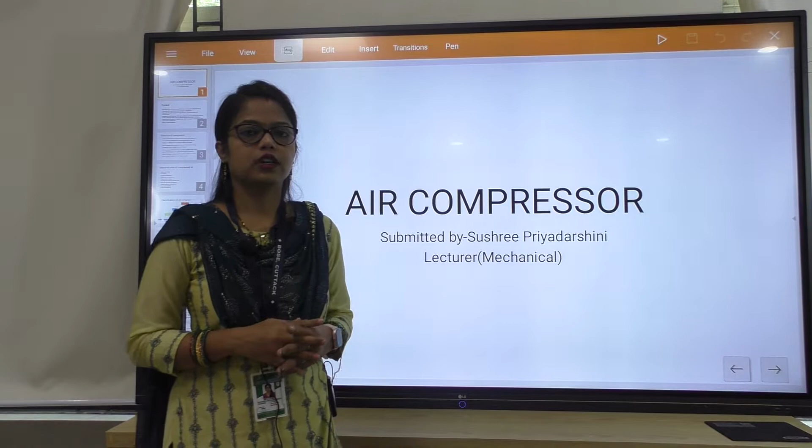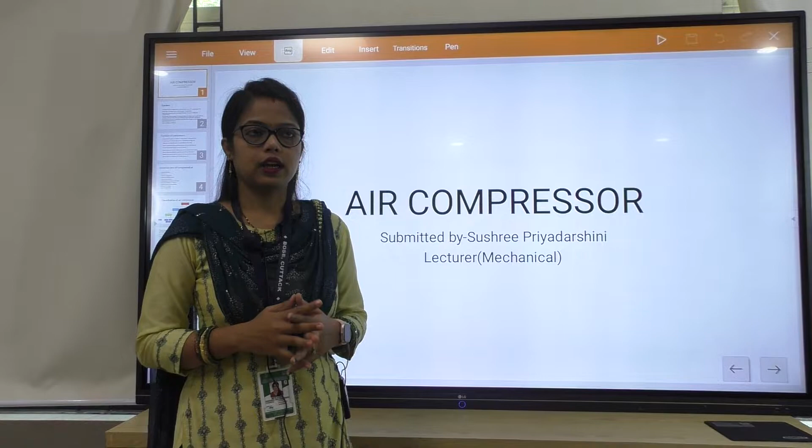In the previous class, I taught you about volumetric efficiency, and also I derived the expression of work done for a single acting air compressor with clearance and without clearance.

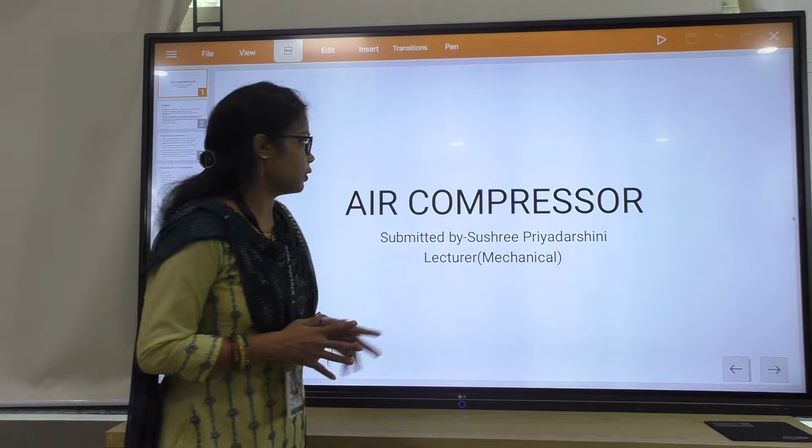So today we will continue with the multi-stage air compressor, and also we will study the free air delivery. This is our content, and I have completed almost all the parts.

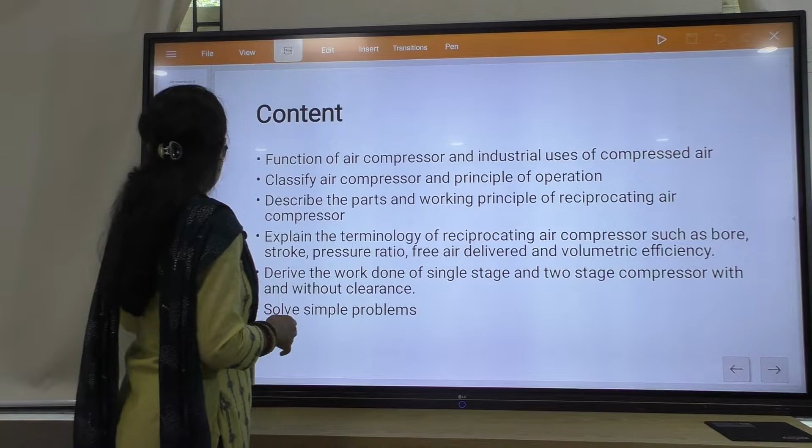In this class we will solve simple problems, and I will derive the work done for a two stage compressor with and without clearance. So let us start from the free air delivery.

In the previous class I completed volumetric efficiency and free air delivery. In the first class I told you about free air, and in the terminology part I told you about free air delivery, that is FAD. This is most important, and you need to understand what free air delivery is.

Actually, what happens is after the compression process, we store the compressed air in the storage tank at higher pressure, which is our required pressure, that might be P2, that is might be 10 bar or 20 bar.

This depends upon our requirement. But what happens when that volume of air is expanded up to the atmospheric pressure?

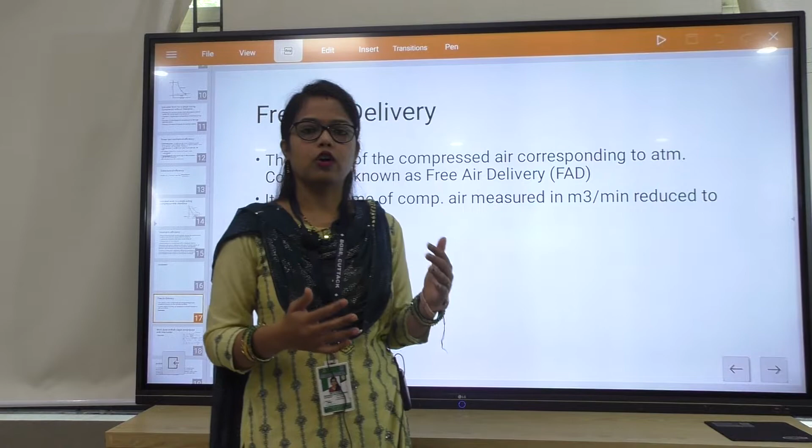When it is allowed to expand, the pressure will be reduced to atmospheric pressure and temperature condition. And if you calculate, or if you store that expanded volume...

...in a separate cylinder, that volume is called the free air delivery volume, and that volume corresponds to atmospheric condition. That means the volume of compressed air corresponding to atmospheric condition is known as free air delivery.

And why are we studying free air delivery? Because initially the amount of air entering into the cylinder, that is our actual value.

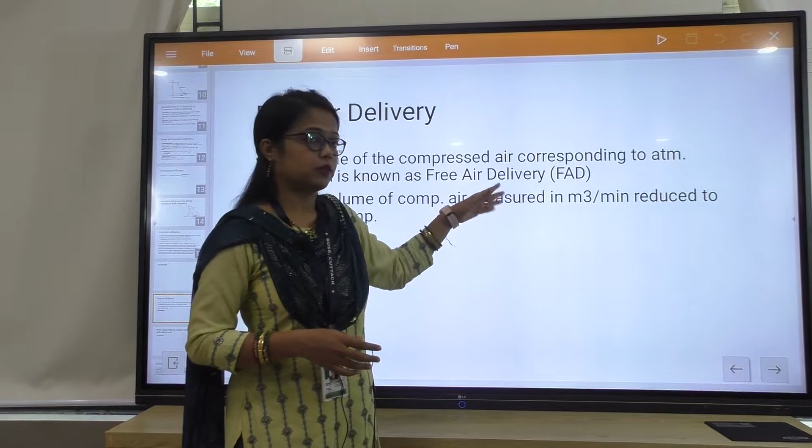But ideally, the piston displacement volume, that amount of air should enter into the cylinder. That piston displacement volume is called the swept volume.

But actually that amount of air is not entering into the cylinder because of different reasons. Previously I told you there are several reasons that amount of air is not entering into the cylinder.

Sometimes clearance volume is there, and expansion of clearance volume happens, and also the cylinder wall temperature is higher. Due to the higher temperature, when fresh air enters inside the cylinder and comes in contact with the high temperature cylinder...

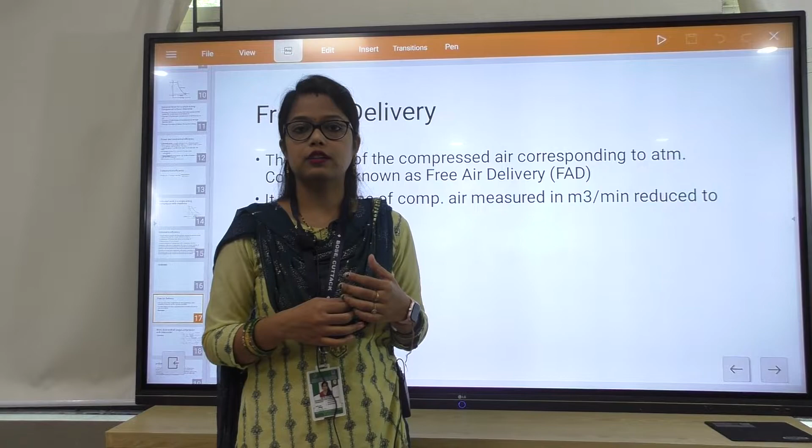...again the specific volume of that air increases, and that reduces the effective stroke volume. That might be the reason.

And also sometimes obstruction of the inlet valve might be the reason. So due to some reasons, these three are possible reasons why the air that should actually enter into the cylinder is not entering.

So that is why we calculate the compressed air volume by allowing it to expand at atmospheric condition, and we store it in another cylinder, and calculate the volume of this cylinder.

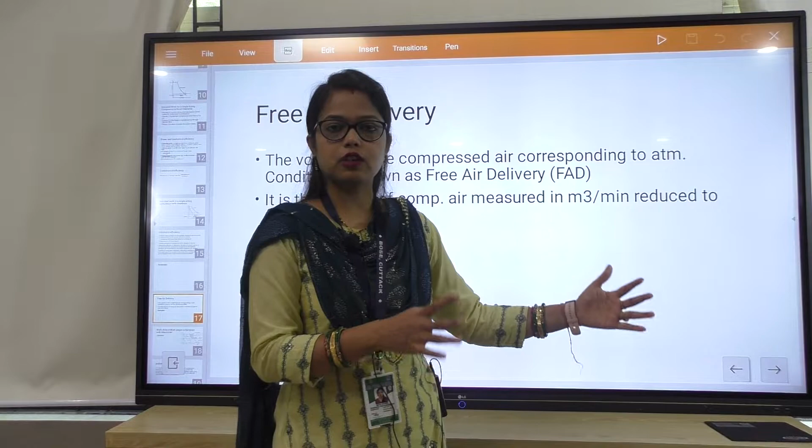When this air expands up to the atmospheric condition, that volume is called free air delivery, and it is measured.

It is noticed that the free air delivery volume is less than the volume which should actually enter into the cylinder.

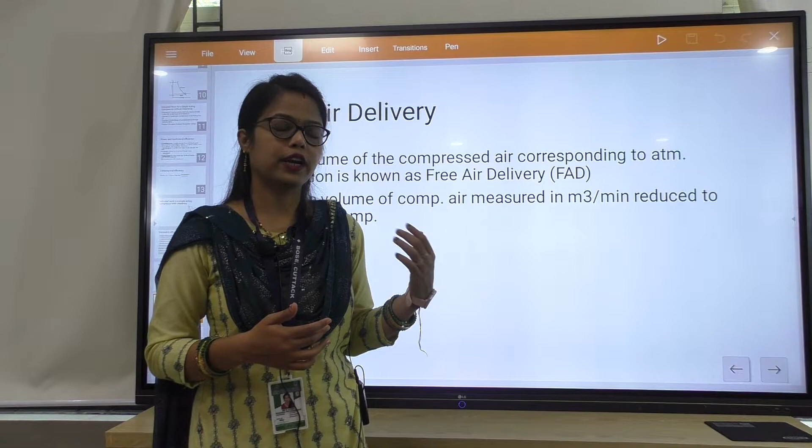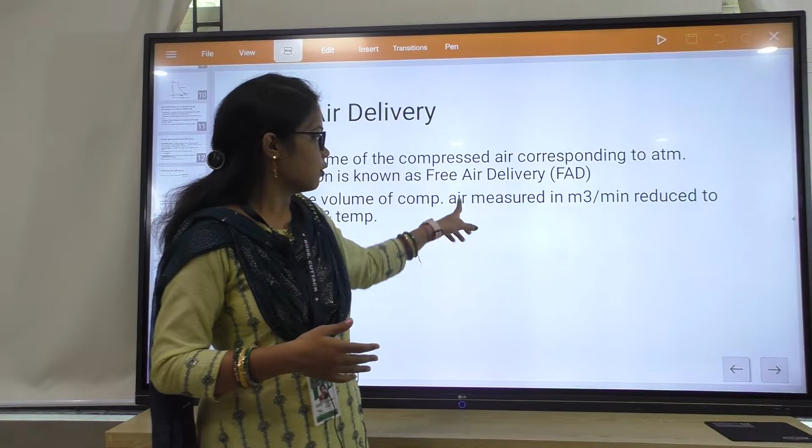That means the volume which corresponds to the initial atmospheric condition, the swept volume, the FAD is less than that volume.

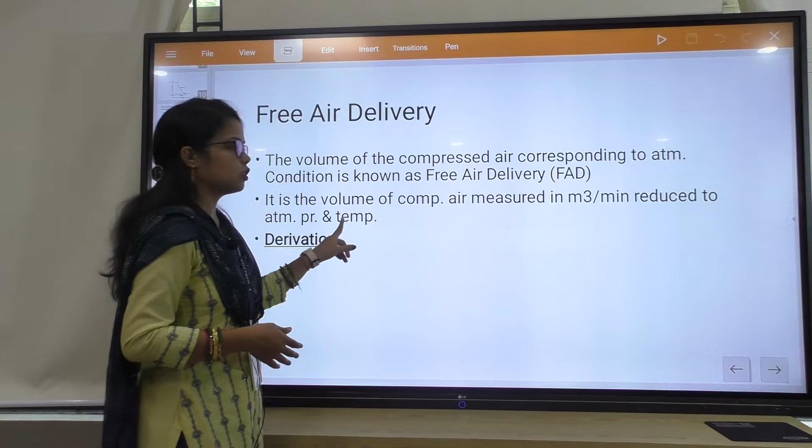So it is the volume of compressed air, measured in meter cube per minute, reduced to atmospheric pressure and temperature, because it was at higher temperature and pressure after compression. When reduced to atmospheric temperature and pressure, that is measured in meter cube per minute.

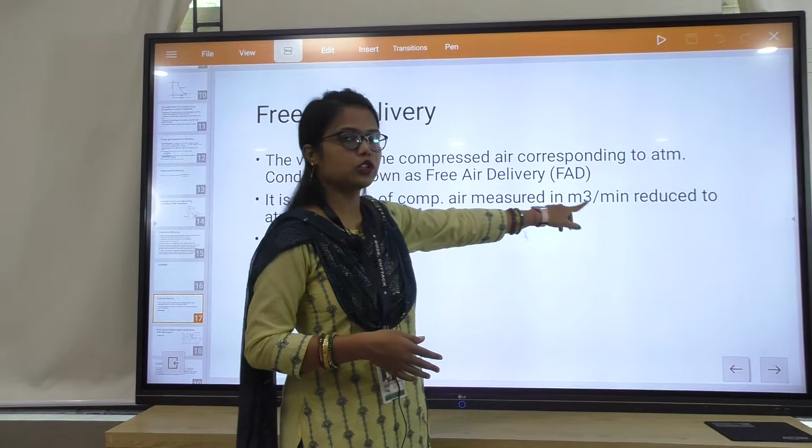What is this value? That value is called free air delivery. And what is the formula of free air delivery?

Actually we have to apply the law, taking two conditions, one is atmospheric condition and another is suction condition.

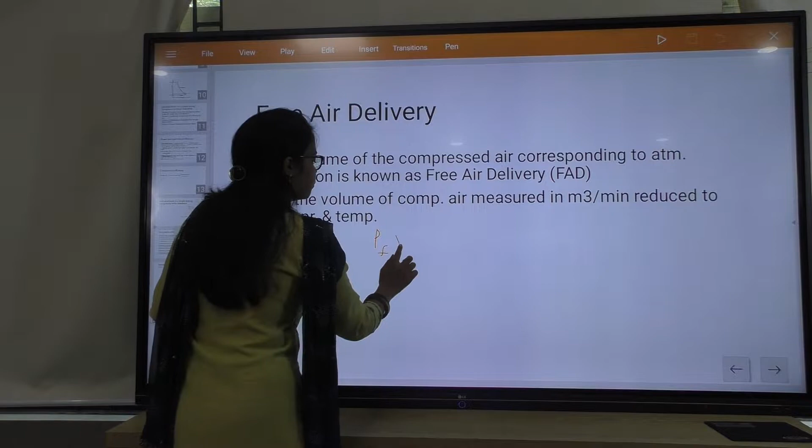So at atmospheric condition we take the point F: Pf, Vf, divided by Tf, that is equal to suction condition, that is P1.

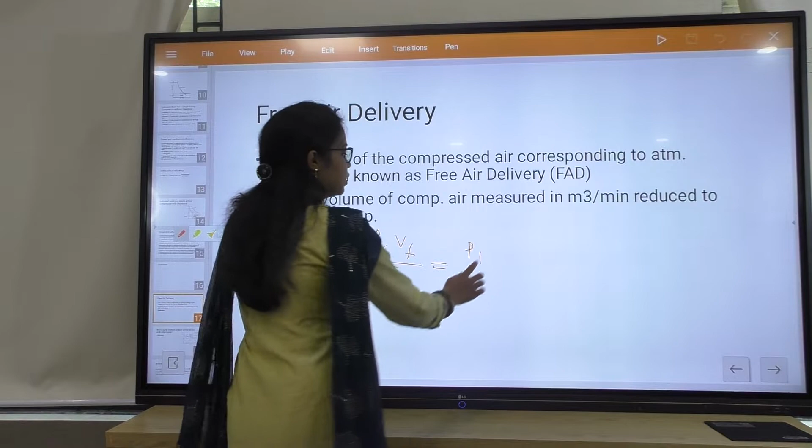You all know the suction happens at pressure P1, and the volume is P1, V1 minus V4, that is the effective stroke volume, divided by T1.

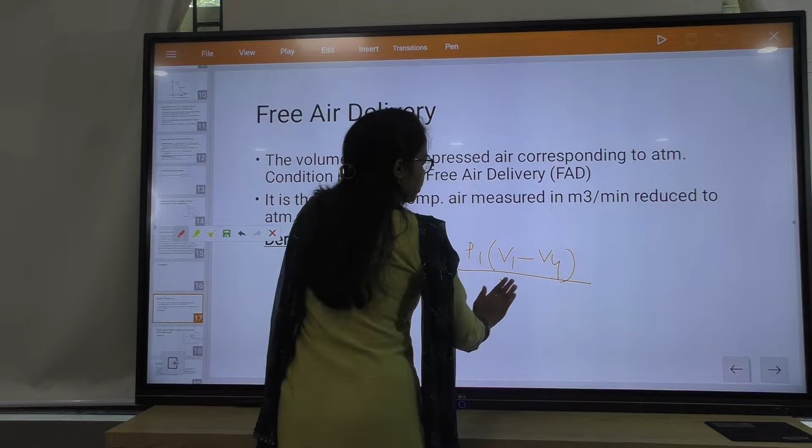So Vf is equal to P1 into V1 minus V4, divided by Pf...

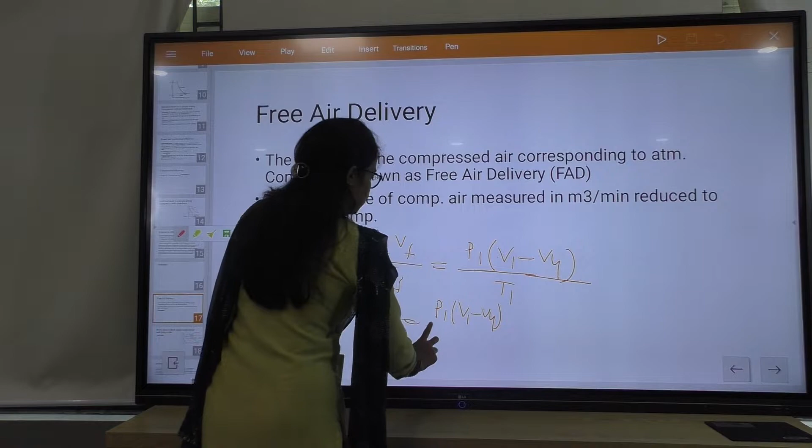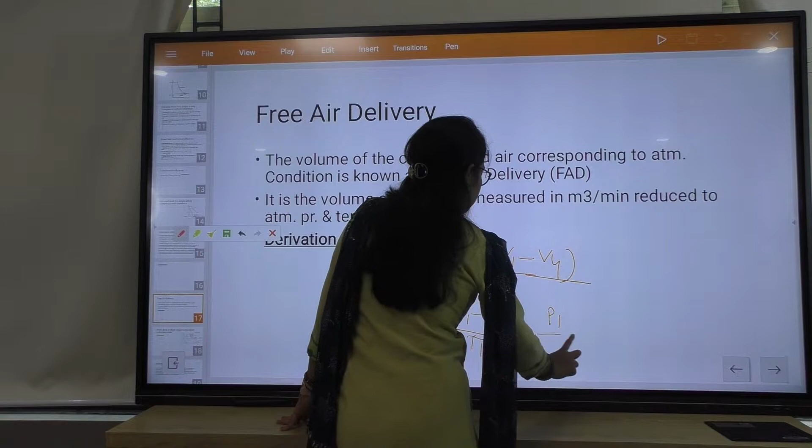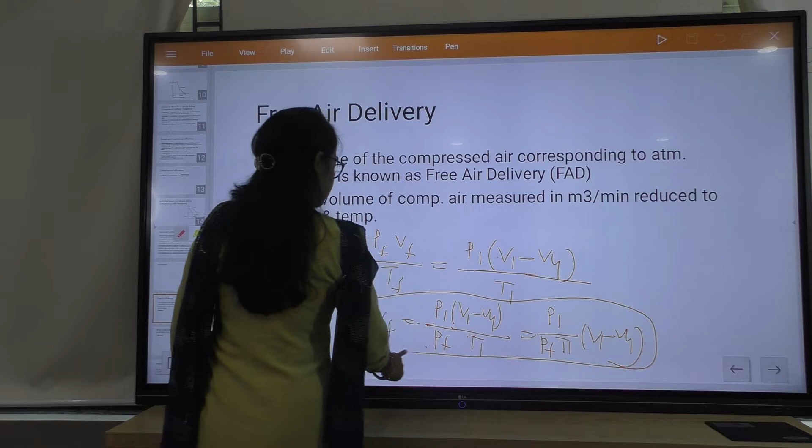...and divided by T1, that is equal to P1 divided by Pf T1 into V1 minus V4. This is the value of what? The volume of free air delivery.

It is measured in meter cube per minute. This value corresponds to atmospheric condition when it is allowed to expand up to atmospheric pressure and temperature.

Pf is the atmospheric pressure and Tf is the atmospheric temperature when it is reduced, and Vf is the free air delivery.

This is the FAD, free air delivery. And what is this P1, T1?

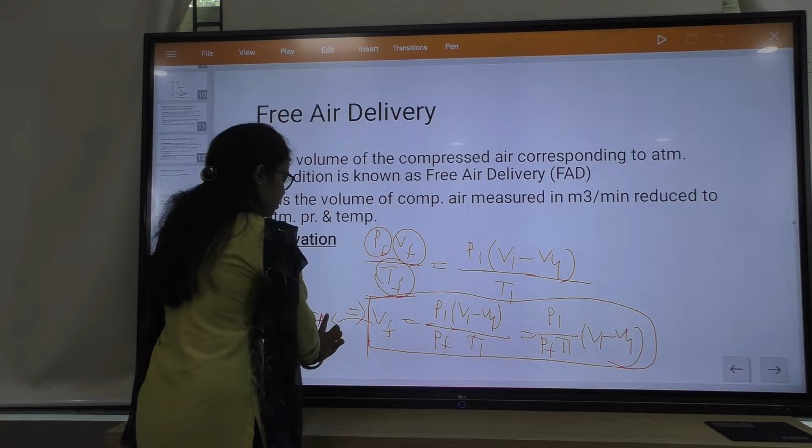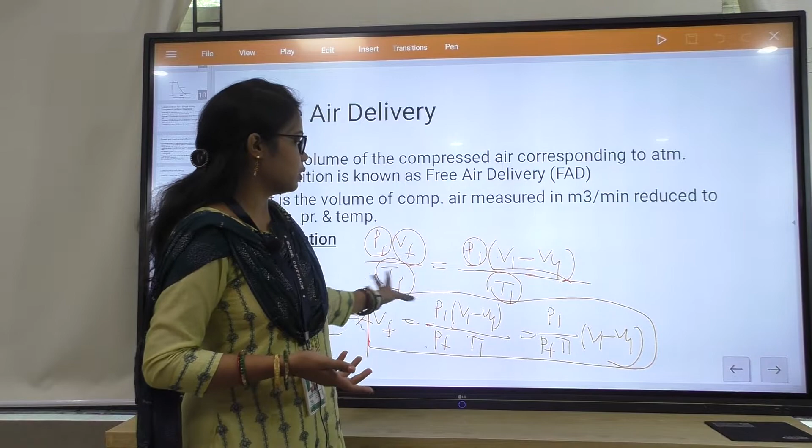P1 is the suction pressure, suction temperature, and V1 minus V4 is the amount of air entering into the cylinder. Clear? So this is the condition, this is the derivation of free air delivery value. You can also solve the problem if a question is given like calculate the free air delivery value, and you can relate these conditions, atmospheric condition and suction condition, and find out the value of free air delivery. So this is all about your free air delivery.

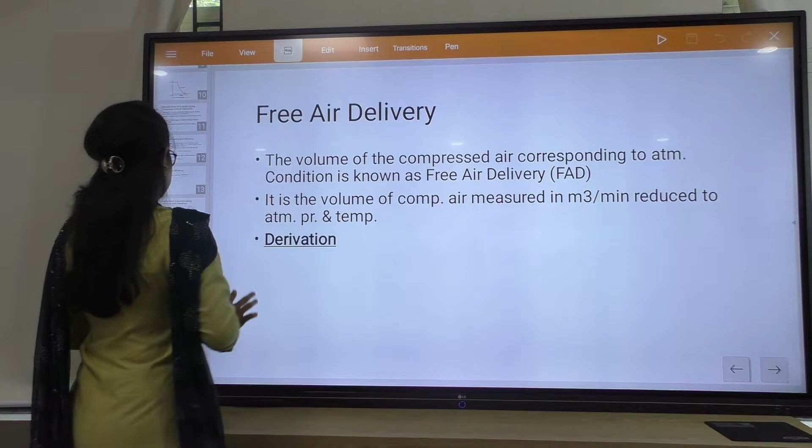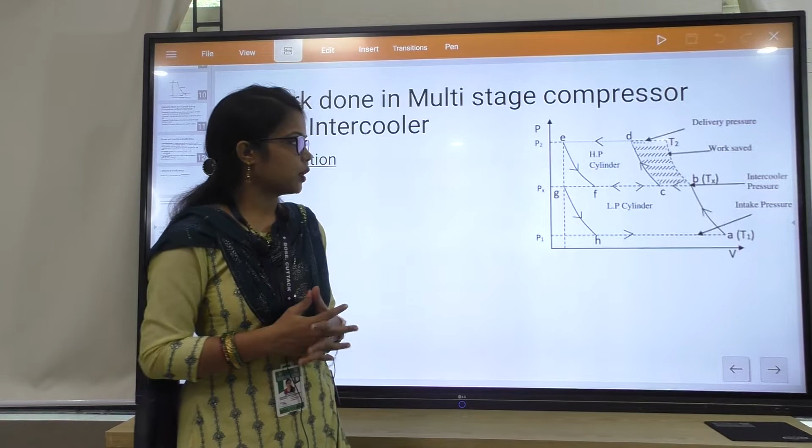After that, we will continue with multi-staging air compressor. Here we will derive the work done for two-stage air compressor. I have already discussed in the first class what is the difference between single stage and multi-stage, and why multi-stage is given. When the pressure is very high and we cannot compress the air in a single stage, at that time we will use two cylinders to compress the air up to very high pressure.

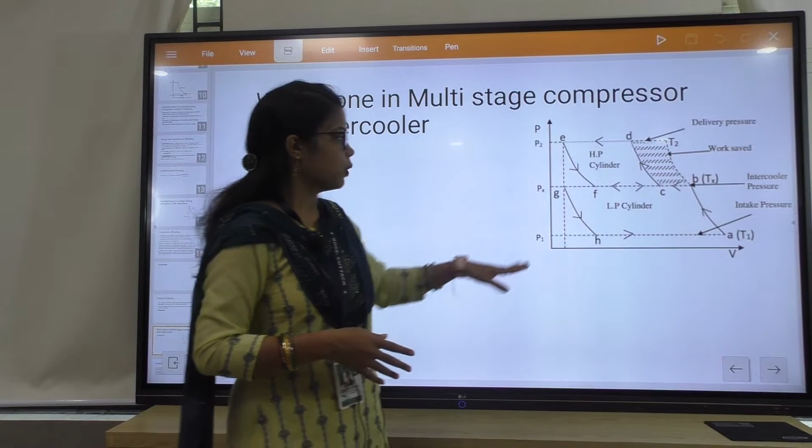That is called multi-staging air compressor. Here the diagram, the PV diagram, is for a two cylinder air compressor. One is low pressure cylinder and another is high pressure cylinder, and in between the low pressure cylinder and high pressure cylinder one intercooler is there. I have told you already, again I am telling, this is the low pressure cylinder and this is the high pressure cylinder, and in between those cylinders one intercooler is there. What is the function of this intercooler?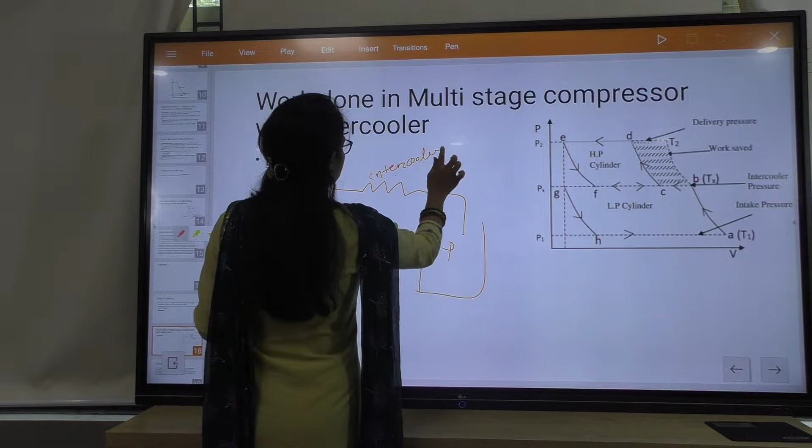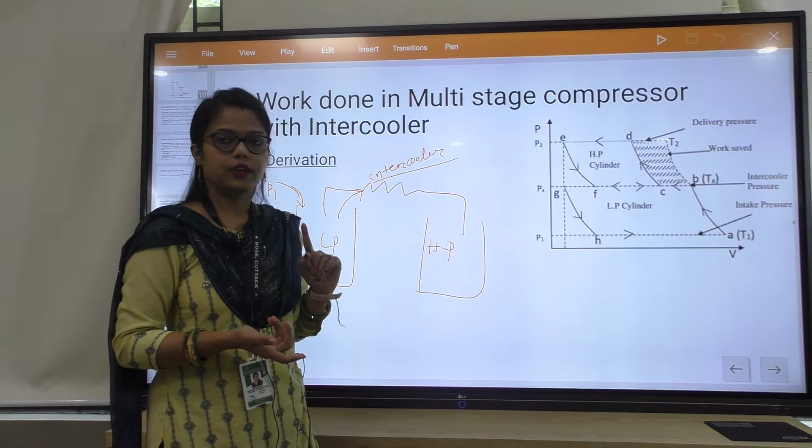Intercooler reduces the temperature which is coming out of the low pressure cylinder. That means the air is entering into the first cylinder at atmospheric pressure and temperature, but when the delivery of air takes place, the temperature increases, because in the compression process both pressure and temperature increase. Our requirement is the higher pressure, not the high temperature air. That is none of our business. So that is why we have to reduce the temperature up to the initial temperature at which air entered into the cylinder, and if the temperature is reduced exactly up to the initial temperature, then that is called perfect intercooling.

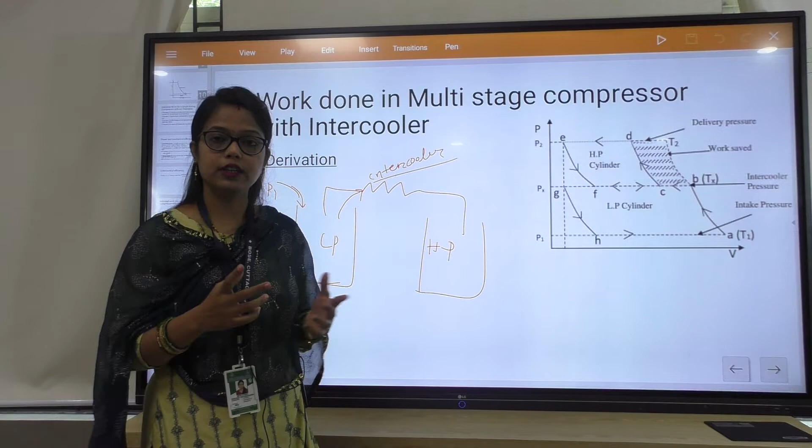That is the function of the intercooler. The aim of the intercooler is to reduce the temperature of air while keeping the pressure constant. At constant pressure it will reduce the temperature of air. So that is why in the intercooler the temperature drops. And I told you, if the temperature is reduced up to the initial temperature exactly, then that is called perfect intercooling. If that is not done, and some temperature difference remains, then that is called imperfect intercooling. Only difference is that.

After that, this is P2 and temperature suppose T1, perfect intercooling happens. This is P1 and T1. This air will enter into the second cylinder. In the second cylinder the compression happens, and after compression pressure increases and temperature also increases, and when it is delivered, the pressure will be P3 and temperature will be suppose T2. Clear? And this pressure is the higher pressure.

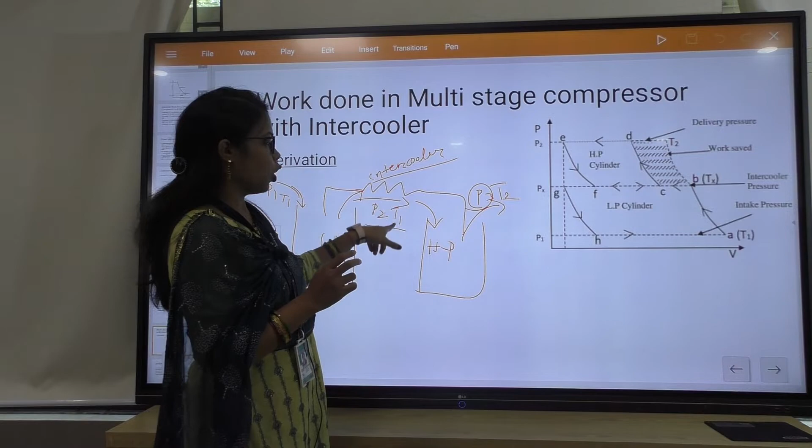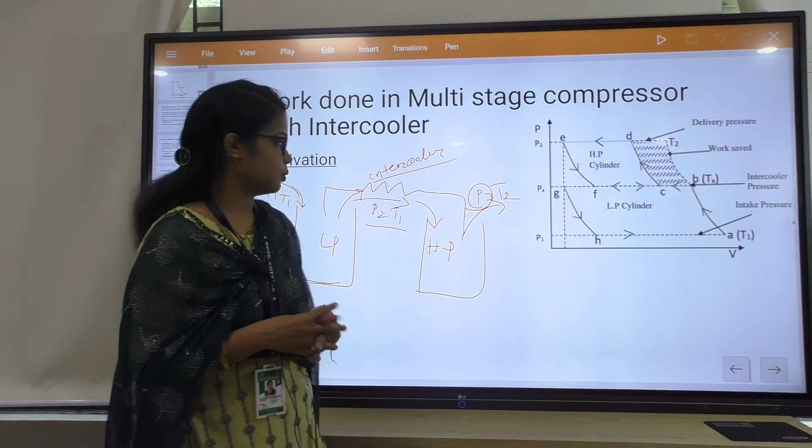If intercooling is not done, then high temperature air will enter into the second cylinder, and that requires more amount of work input for the compressor. So if we do the intercooling process, the amount of work done which we have to provide to the compressor will be reduced. We will understand that by doing this work done derivation. So this P3 is our requirement. This air will enter into the storage tank. Definitely this is very high pressure. That's why we are doing multi-staging.

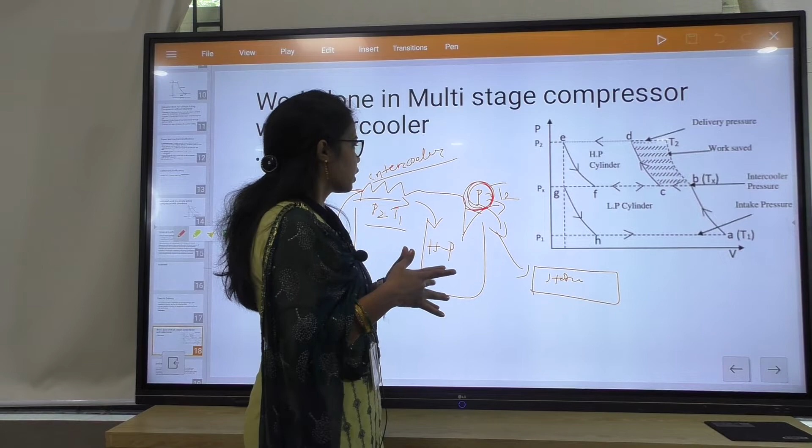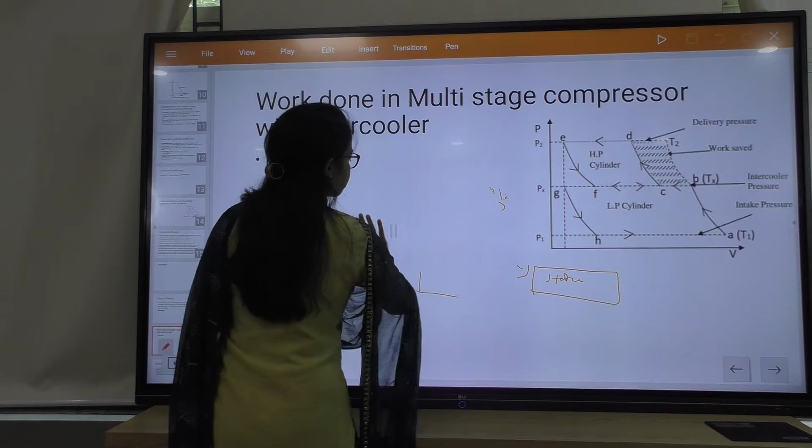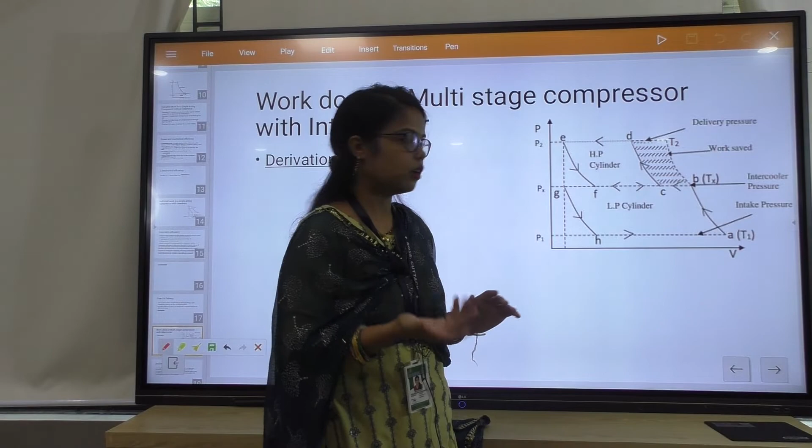We are not doing it in a single stage. We are using the multi-stage air compressor. Now we'll derive the formula of work done for the two-stage air compression. Here you can see there are two cylinders, one low pressure cylinder and another high pressure cylinder. AB process is the compression process, and C2D process is another compression process in the higher cylinder, and G2H is the expansion process in the low pressure cylinder, and E2F is the expansion process in the high pressure cylinder.

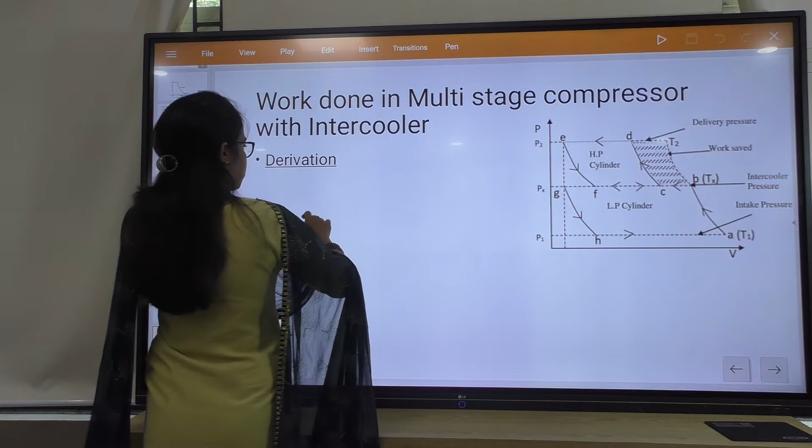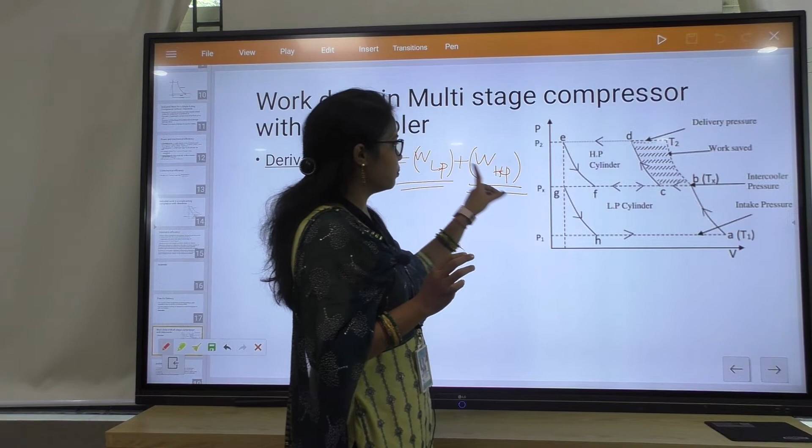What we have to do, we have to do in two phases. First, we have to find out the individual work done for low pressure and high pressure cylinder, because net work will be work for low pressure cylinder plus work done for high pressure cylinder. We have to add this amount of work. And previously here clearance has been provided. Previously we studied about the work done for the single stage air compressor with clearance.

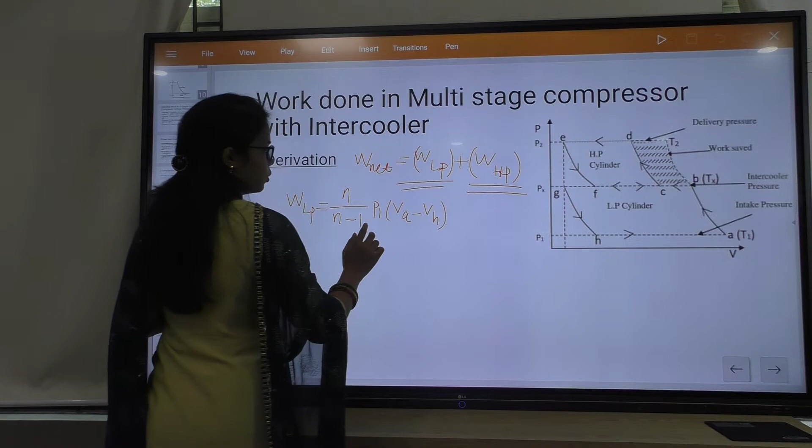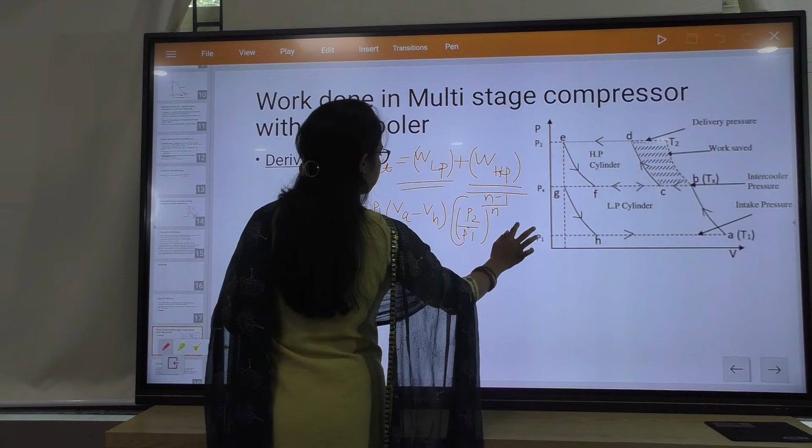So if I calculate the work done for the low pressure cylinder, what will be the formula? N by N minus 1, P1 into VA minus VH, whole into P2 by P1 to the power N minus 1 by N, minus 1. So this is the formula for work done for the low pressure cylinder.

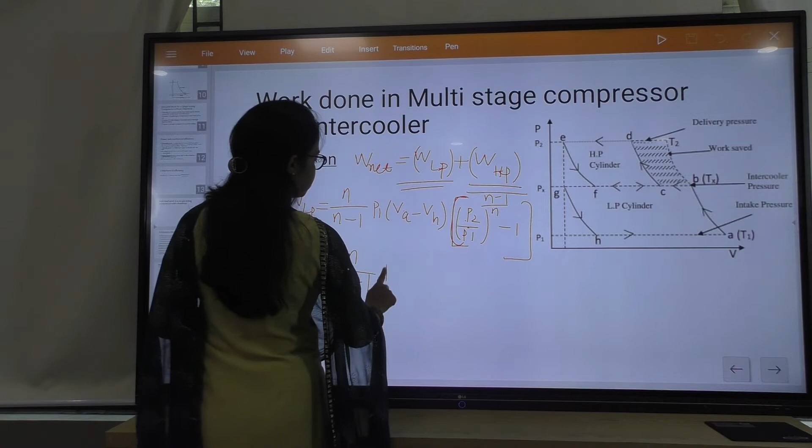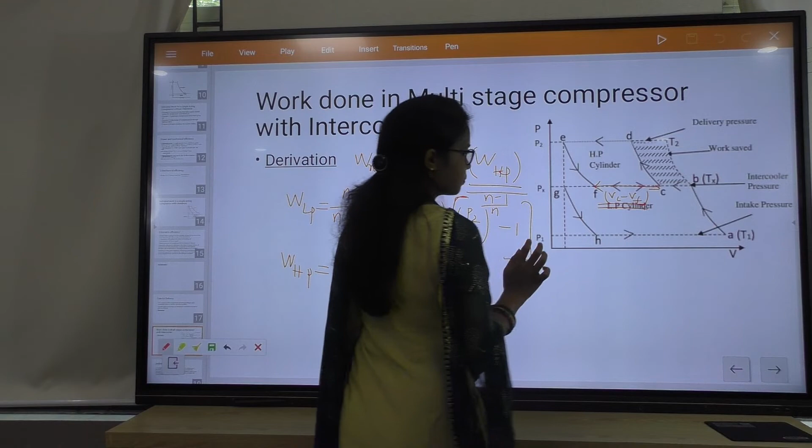If I am calculating for the high pressure cylinder, then N by N minus 1, P1 into VC minus VF, this amount of work, VC minus VF, whole into P3 divided by P2 to the power N minus 1 by N, minus 1.

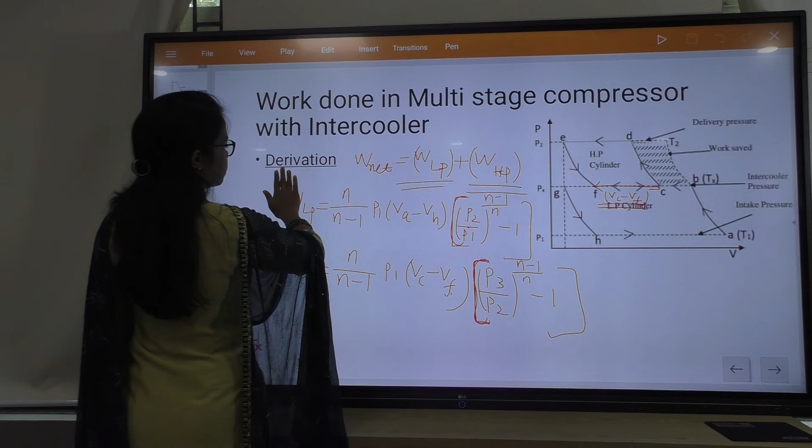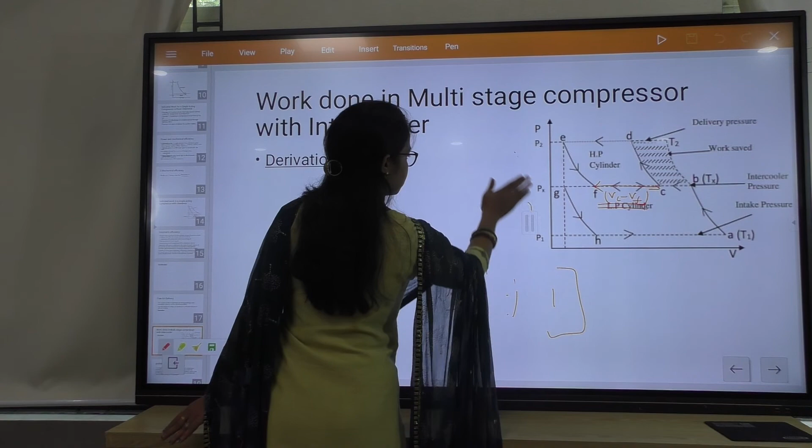So now we will find out the net work. W net is equal to work for low pressure plus W...